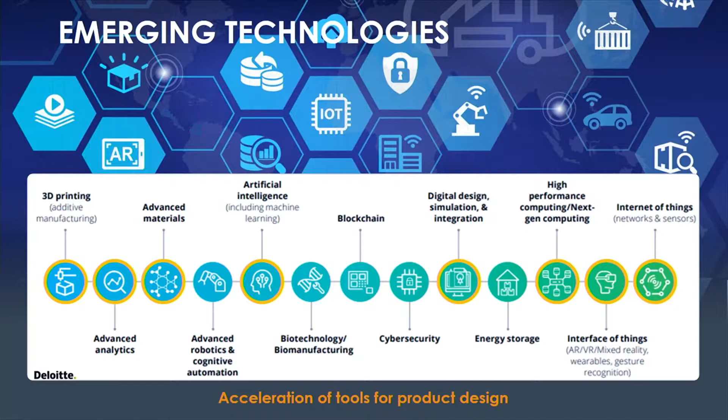Otherwise, we feel like it's going to be useless to you, right? And so that's, in fact, exactly what we are doing. What I'm going to do is use this wayfinder to walk you through what we've been up to. We're investing in 5 major areas across CREO to address those 8 orange circles you see there on the slide. And we're doing it on a single CAD platform that scales all the way from exhaust systems for Polaris.

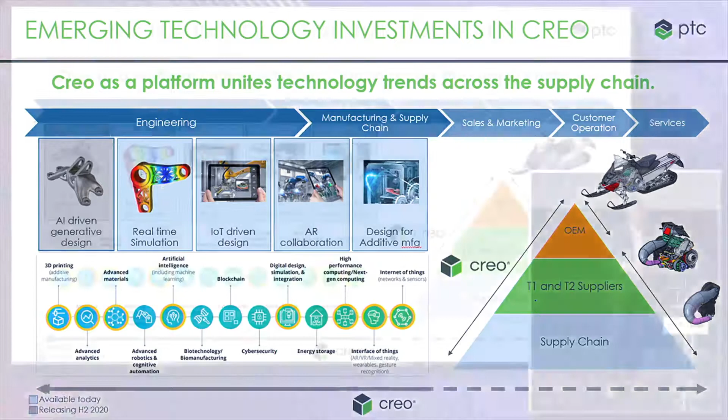I actually met that vendor at an event in the San Francisco area a few months ago. All they do is exhaust systems for Polaris. Of course, Polaris is a big PTC customer. All their major stuff is designed in our software.

But it goes much, much further than that. I mean, Polaris snowmobiles are, I don't know, a few thousand parts. There are assemblies out there that are hundreds of thousands, millions of parts in CREO, managed in Windchill. It's a single CAD platform that can scale from exhaust systems for Polaris snowmobiles to a 3.5 million part assembly built by the federal government, National Ignition Facility in the United States.

So we can scale with a single platform to whatever your needs are, and every bit of technology I'm going to talk about today will be right there at your fingertips in CREO.

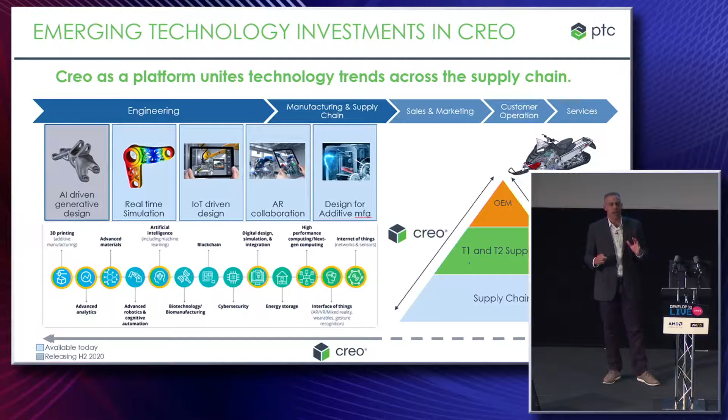All right, so I'd like to start with the only bit of technology that I'm going to talk about today that is on the near-term horizon, not quite in there in CREO, and that's generative technology. It's a little hard to talk about design without talking about generative technology nowadays. You got to make sure you address the big innovations happening in the world of generative design. This is one of those technologies that can really help democratize engineering and manufacturing knowledge. It is manufacturing-aware technology.

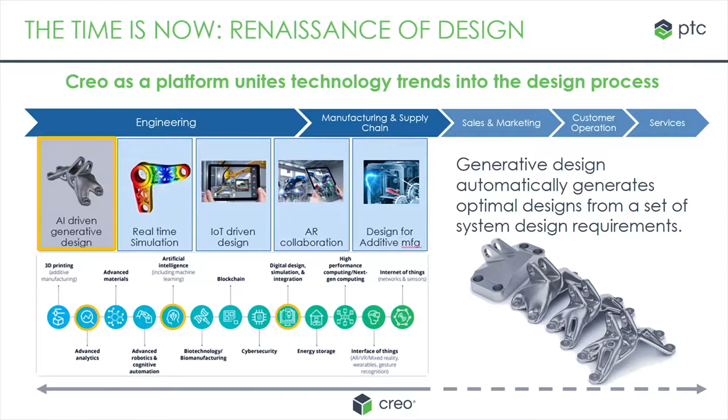I heard that phrase earlier today. It's very true, and PTC has been hard at work here, but we found a great opportunity to acquire a company called FRUSTUM about 5 months ago, who we believe was the leading technology player out there. We're very thankful to have Jesse Blankenship and his team working for PTC now, and we are hard at work making that technology part of the CREO platform.

We're not going to deliver you a point solution in generative technology. We're putting it inside CREO. So those of you that know Jesse, he's here today, and frankly, he's the expert about what I'm about to present, and I wouldn't have these slides if it weren't for him. So thanks, Jesse, for that.

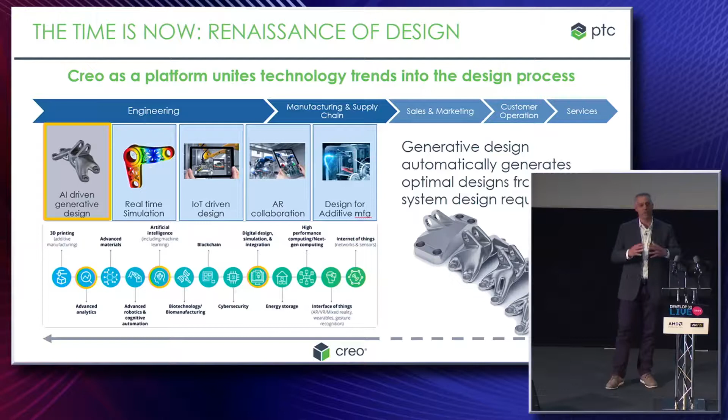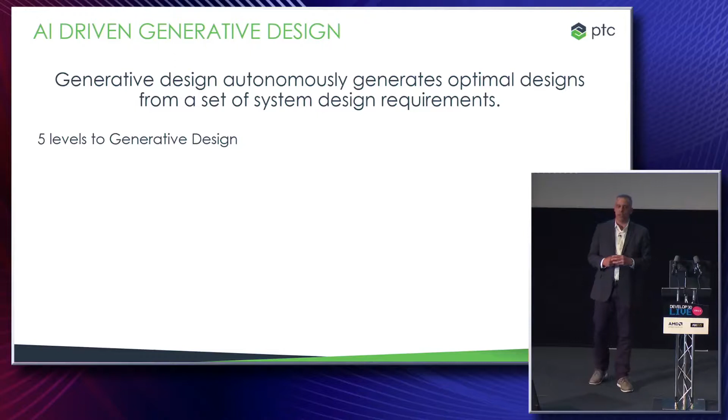What I want to do is walk you through a maturity model. There's been a lot of talk about what generative design is and what it isn't, and I feel like we're frankly one of the world's foremost leaders in generative technology now working for PTC. We have the opportunity to define what we feel like the generative design continuum really is. So let me walk you through it. I'm going to use a model that you're probably all familiar with. If you're in the engineering domain, you're familiar with the autonomous cars industry, and they use a maturity model that goes like 0 to 5, and I'm going to use a similar type of model to define the generative landscape.

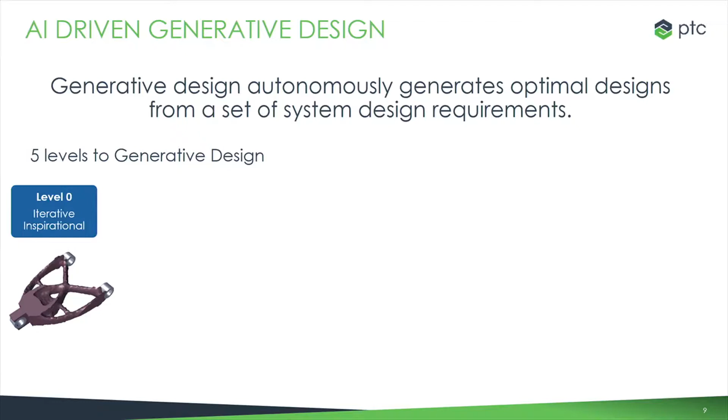So at the very left-hand side, not truly even generative design, we have what we call inspirational, iterative inspirational technology. It's really just topology optimization without manufacturable geometry. There are technologies out there that do that. That's where topology optimization started. I wouldn't even really call it generative design because it only inspires, if you will. That's where the word is, inspirational, iterative. It only inspires what the actual geometry should be, but the design engineer has to take it from there. I wouldn't even really call that generative design. It's just a base technology piece that is important for generative, but it's certainly not the whole story.

The next level up from that is the first time you see manufacturable geometry. So there's a lot of tools out there that'll get you this far.

You certainly can get that far in CREO, where you have your topology optimization results, and now you've got manufacturable geometry that you can carry on through the process. But that's still really just topology optimization with a nice twist, in that you're getting manufacturable capable surfaces out of it. Really, when you start seeing true first-level generative technology, it's really at level 2.

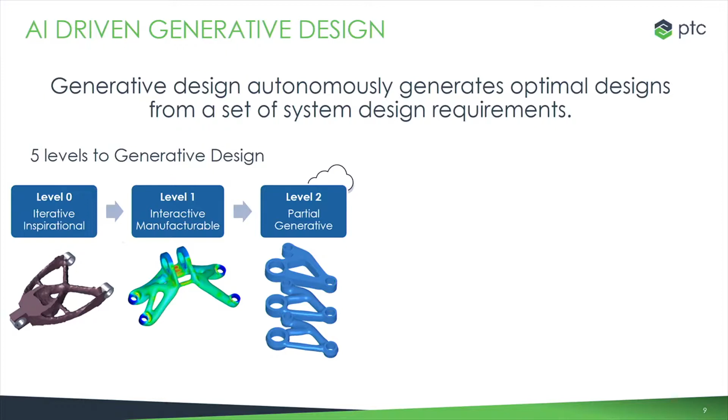Now, when you're doing this kind of computation, it's mostly probably going to be done on the cloud. It's not a requirement, but it's probably better, more scalable to do that in the cloud. That's why I added a little cloud icon. I am taking some liberties here with my icons. You just have to work with me here, okay.

At level 3, things start to get really interesting, because you're adding multiphysics into the game, and you're now starting to add some of these genetic evolutionary algorithms that could take 3, 8, 10 solutions and blow them out to hundreds of potential solutions to the same problem.

Genetic evolutionary algorithms are something I'm most certainly not an expert in, but we did indeed acquire technology like that when we acquired the Frustum technology, and it's going to be mind-blowing when it gets applied to CREO designs. We're really excited about where this will take us, and frankly, we expect to be here at this level in less than a year when we get the Frustum technology integrated into CREO.

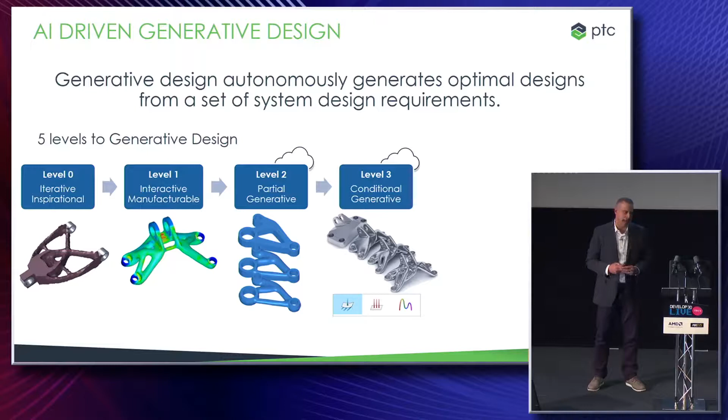So if you're thinking about where you're at today with your design process, imagine being able to apply this in CREO in less than a year from now. So we're headed there really fast. But let me build out the model and start to talk about some really crazy, wild things.

At level 4, we're almost fully autonomous, like a Star Trek world here, but level 4 is actually not too crazy. You're adding things like machine learning. Imagine a generative system that can take a look at your database of hundreds of castings that your company has done for years and years, and also take a look at enterprise information like cost, design for manufacturability information, maybe process quality information, and learn what does a good casting look like at your company. And then apply that the next time it's asked to do a generative study, and include casting as one of the manufacturing constraints. That's what level 4 generative technology will look like.

So I have a ThingWorx logo here because it's PTC's award-winning industrial IoT platform that can bring enterprise information in from any source for use in, say, a generative study. I also show a little assembly icon here because we expect at level 4 that generative technology can work at the assembly level and propose solutions with multiple part configurations versus just at the part level.

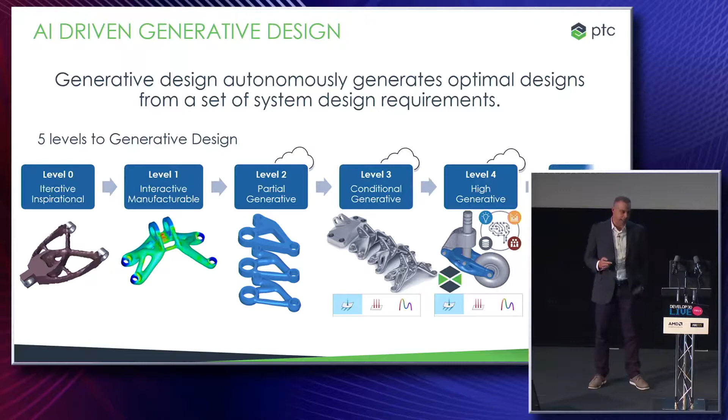Level 5 is, if you're a geek like me, level 5 might be like the Star Trek replicator world. It's just give me a coffee cup that does this, or I don't know, just give me a laptop, and boom, you got a laptop a few days later. That's crazy talk.

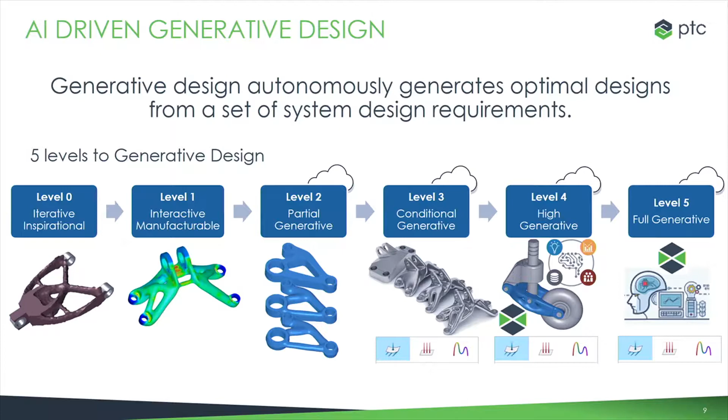But you have to have a right-hand scale and a left-hand scale on your scale. You have to have a right-hand maturity level and a left-hand maturity level. So you have to have a goal. Think of level 5 as like the fully autonomous - like I got in a car last night at Heathrow and drove here, but there was someone driving the car, instead of just getting in and saying, please bring me to Sheffield University. That's a fully autonomous car on the right-hand side. You could think of ultimately us all having a goal of fully autonomous generative, in the fairly distant future.

So back to level 3, what might it look like in the world of CREO? These are all sort of video shots pulled together of technology from our Frustum acquisition, but I want you to think through what this will look like inside CREO. This should play automatically. Yes, excellent.

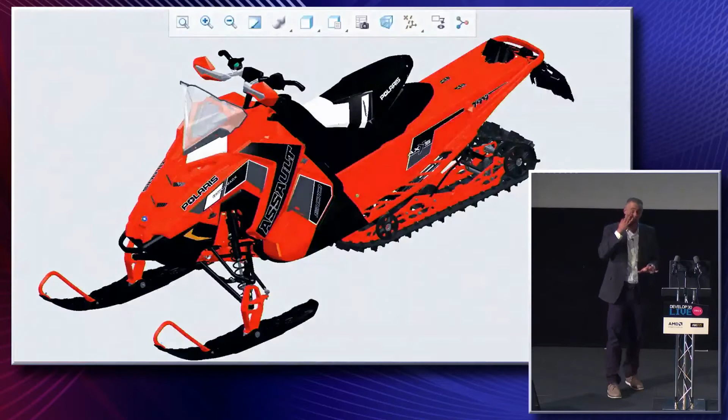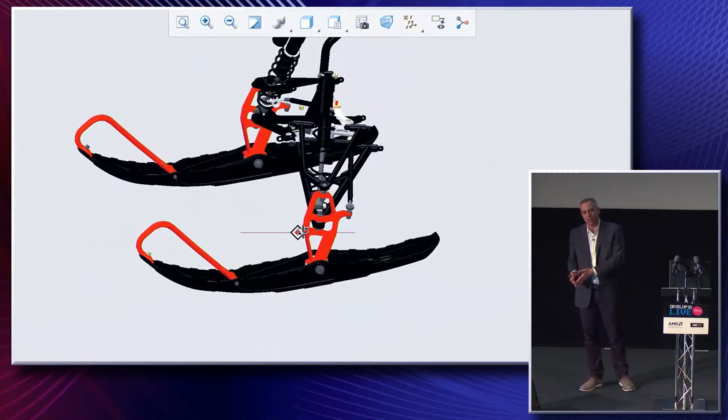So just like any other generative solution you might think, when you start out thinking about a generative solution, you have to define loads and boundary conditions and so forth that are the inputs to the generative engine. It just so happens, because this is a Polaris assembly that's got dynamics built into it, all that is done for you - all the loads and boundary conditions are all just coming from the assembly, so it's not a problem. Well, now then you have to define the domain - what is the domain that the generative solution is going to apply in?

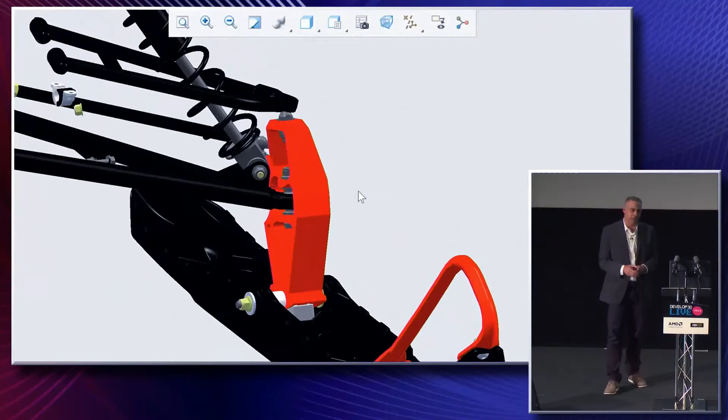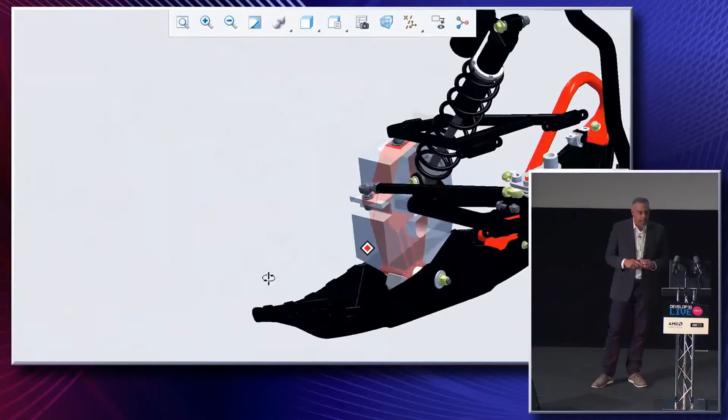Easy to define. It's just a simple volume around the part we're working on, this red strut. You've got to have clearance for getting at the assembly points, and you've got to have a notion of what the motion envelope is of the structure around there of the suspension. And so once you intersect those, now you have the domain that the generative system has to work on.

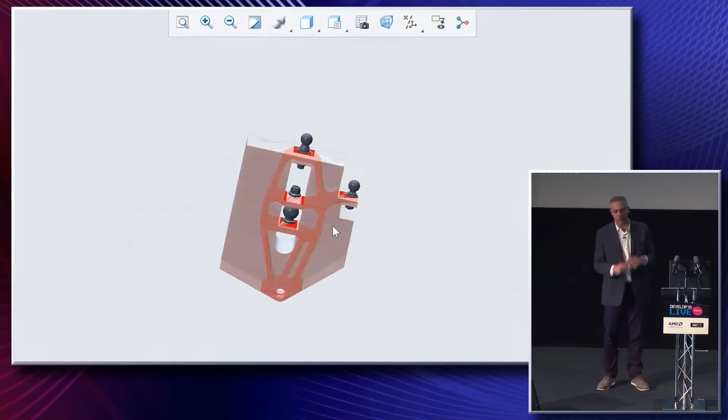Again, think about this all inside CREO. You're not in a point solution, right? So once you have that all defined, you got everything intersected, now you can go off and have the generative system run. We did a cool little montage so you can see multiple manufacturing process constraints converging at the same time.

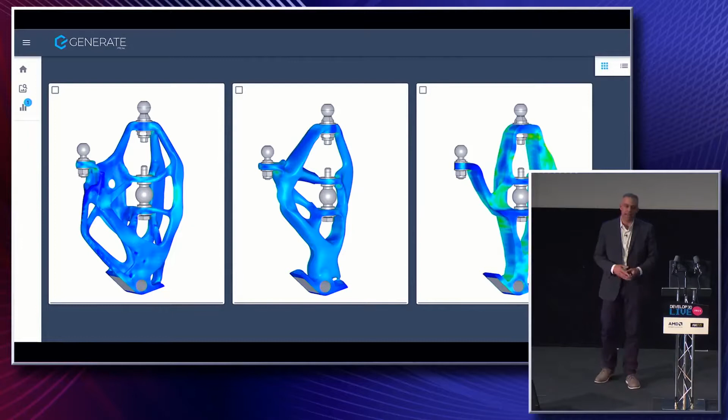Imagine this all running on the cloud. It could run locally, but it'll run faster on high-performance compute on the cloud. On the far left, you see sort of an unconstrained case. In the middle, you actually see a casting solution. I've seen some crazy parting lines automatically generated by the generative engine today that are really hard to model yourself, but the system is smart enough to know where to put them automatically. And on the far right, you're seeing a 3-axis machined example.

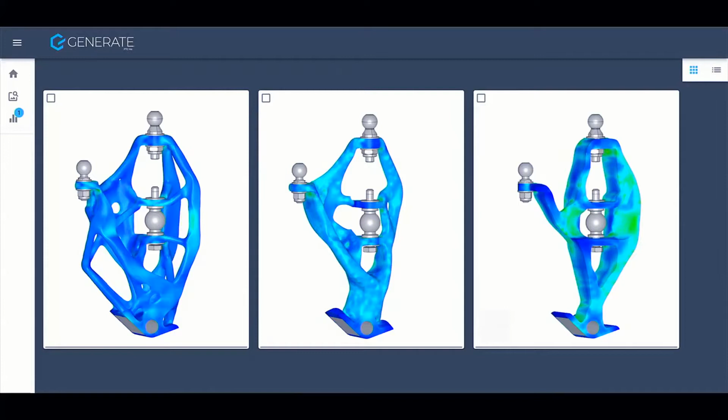All the stress solutions are all there for you so you can inspect what the results look like. But even more interestingly, as you go through this process of evaluating different designs, I'm only showing you 3 because I wanted you to see some of the detail here. I could have shown a lot more, multiple materials, that kind of thing, all possible with the Generate solution that we acquired from Frustum. But I wanted you to see some of the details and kind of see how clean everything looks. That's straight out of the system as it exists today.

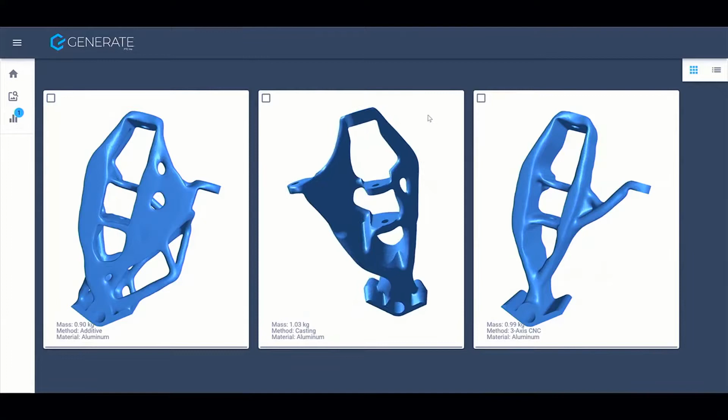Very, very clean, very nice, already coming out of the system. And you can evaluate those on the cloud, take a look at what the results were of the convergence, and then once you pick one, you get it immediately integrated back into your core CREO application on your desktop machine. And so the point of having this seamless integration into the CAD environment is a really, really important one.

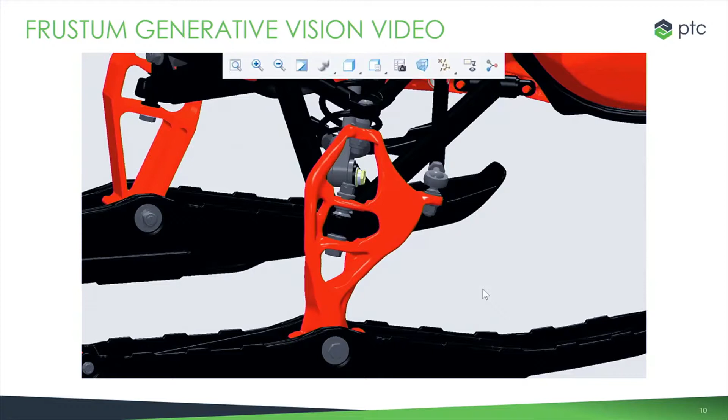And because these technologies have the innate ability to understand manufacturing processes and even over time learn what good manufacturing processes or good manufacturing parts look like, they can get better and better at democratizing that manufacturing process knowledge that might be going out the door as more and more really senior engineers retire.

So that's our generative strategy. You're going to see that technology in production hopefully next year when I'm here to talk about it and show you a lot more detailed demos.

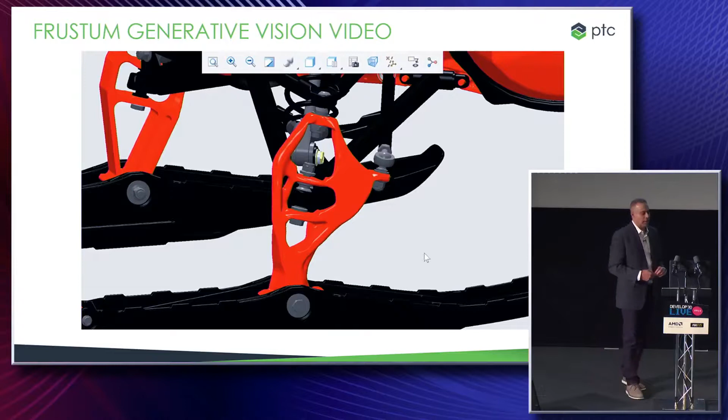I'd like to move on and talk about simulation. So there's been a lot of talk about simulation today. I think one of the challenges with simulation as part of an engineering design process is how disruptive it can be. It can be super helpful, but for the everyday design engineer, the knowledge of how to simplify a model in order to get an answer in a reasonable amount of time is not obvious to a lot of engineers.

And even if the simulation takes 15 or 20 minutes, it's disruptive to the workflow. If you've used CAD for 6, 7, 8, 10 hours a day, you know that you're moving, you're making changes, you're evolving your design. You need a simulation technology that can really keep up with you as you design.

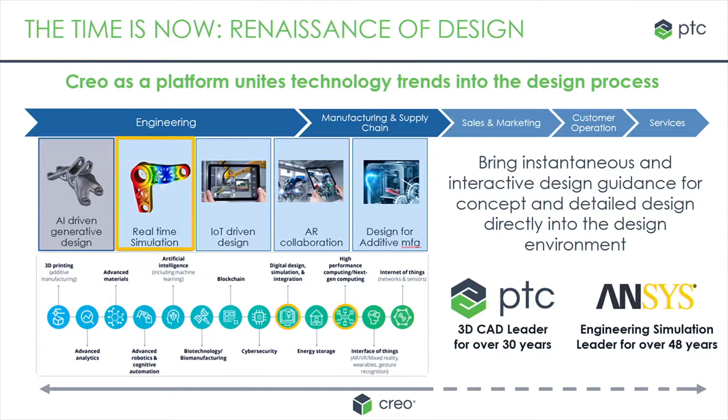And we found that simulation technology in the technology from Ansys. It's their Discovery Live simulation technology. It's so fast, it can really keep up with you as you do your design work and provide that design guidance that a design engineer really needs minute by minute as they make design decisions.

So we're really excited to already have this technology in production. By the way, everything else I'm going to talk about today, you can see live demoed in our booth. It's production technology. We've already been selling this now for a little bit of time.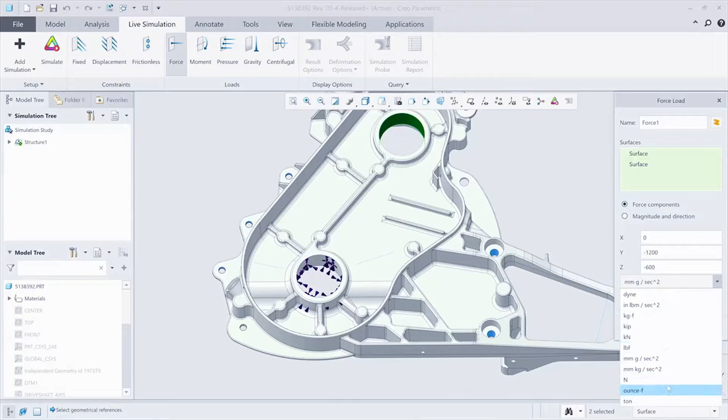The first part of this video, what you're going to see is how CREO Simulation Live can keep up with you as you make design decisions and how quickly and easily it can get you answers. You're never going to see any part simplification. You're never going to see simulation done in a separate environment. You're right here in CREO. And as a design engineer, you do inherently understand, okay, I'm holding it here and I'm pushing here and I'm pushing with a certain amount of force.

As soon as you hit go, within 2 seconds you got your answer. Not 5 minutes, not 10 minutes, no simplification, you just have an answer in CREO. So now you have an idea where are the hot spots, where are the not so hot spots with the current set of loading conditions that I have, and you can then go evolve your design.

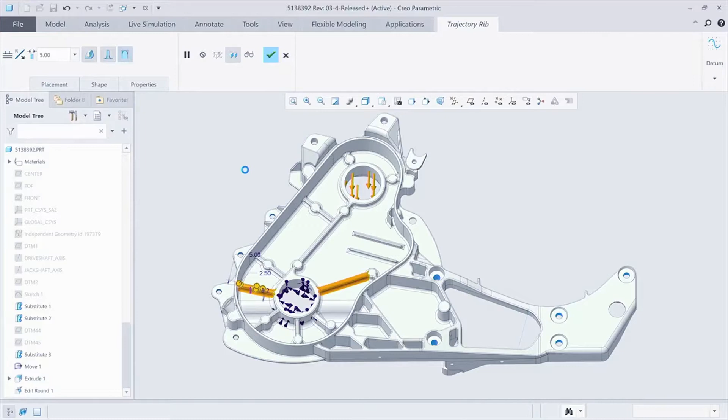You see the simulation result here paused, but only because I'm in the middle of creating a new feature to address some of the high stresses I have in the model. As soon as I am done, the stress results update, seconds later. It's like choosing whether or not you have the part in shaded mode or not. It's that fast, right?

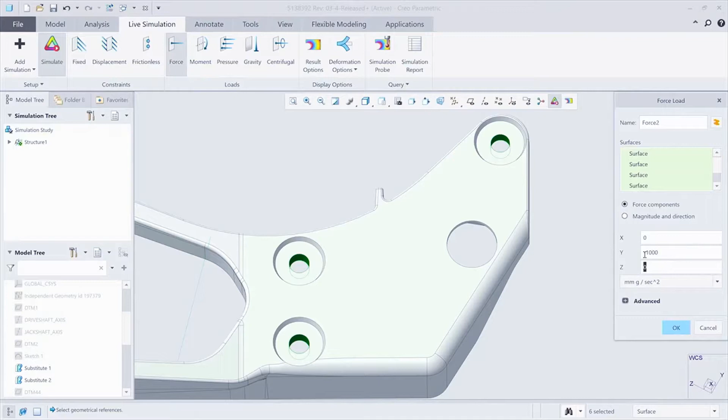So fine, the design requirements change. I'm early in the design process. I'm already getting simulation feedback as I design, but I got new requirements. I have new load information. So I'm applying that new load information, and you'll see as soon as that new load information is incorporated into the system, again, the design updates, and now I have a new hotspot.

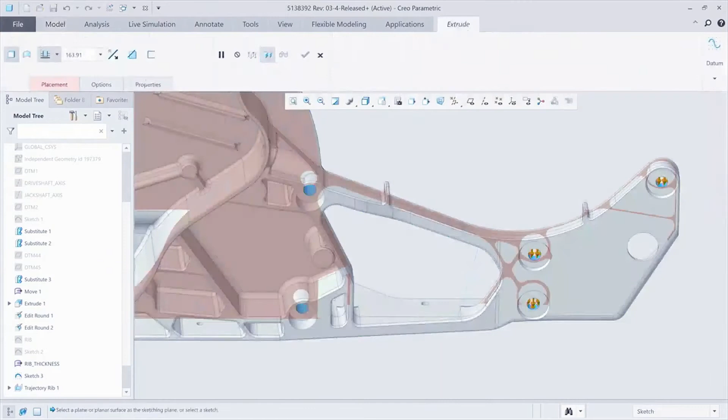I got a different problem. Actually, the stresses in the area that I was worrying about before, not quite as bad as they are in a new area. So fine, I'm evolving my design, and I'm getting feedback as I go. Every time I make a change, I know whether or not I've improved the situation or I've made the situation worse, and I haven't had to consult the simulation expert once. I'm just there doing my design work as an engineer, right?

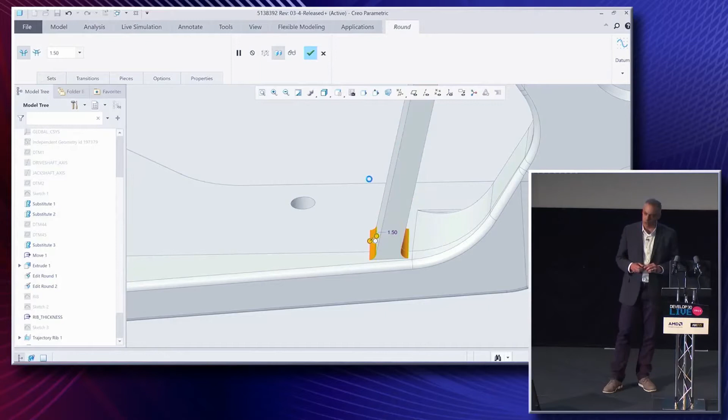So I make another rib. I see things that have significantly improved, but all good design engineers know that you don't do a molding feature on a molded part without adding some nice rounds, right? We don't want to have sharp edges in our tool. So, okay, we'll add some rounds. You see the situation gets a little bit better, but it's actually not, I know what's going to happen.

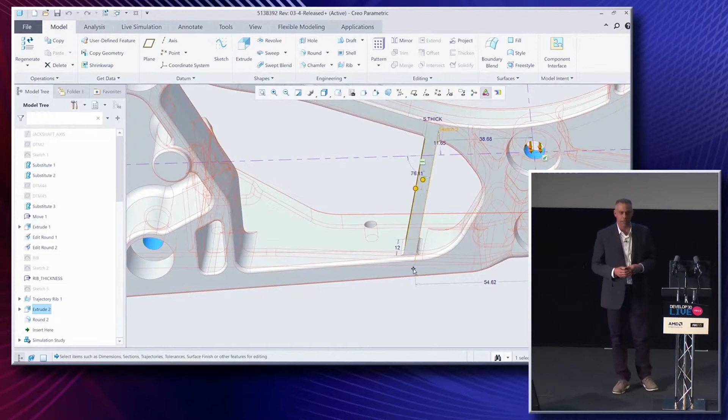I've shown this video before, right? Okay, I know what's going to happen. It's actually not going to improve until we move the rib over. We got to actually change the flow of stresses in the part a little bit. So once we move the rib over, then things significantly improve. Okay, so that's what you see here at the very end, moving the rib over, and now things really improve.

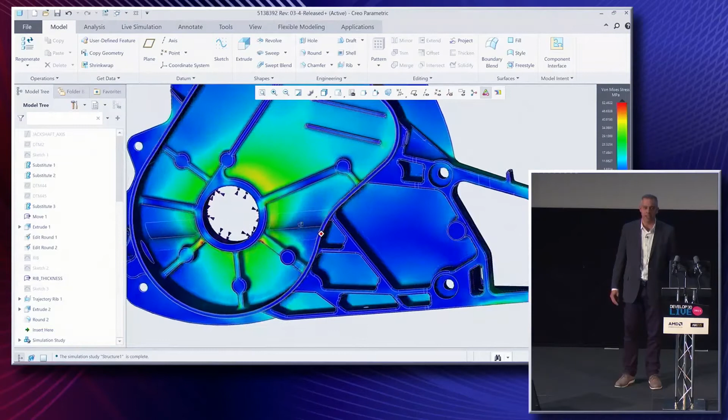The point is, not a single time did I have to get up out of my seat, walk down the hall, and ask a simulation expert to help me simplify the model so that I can get an answer 10 minutes later, or 2 hours later, or 4 hours later. I just did 4 or 5 simulations in a matter of minutes, right? Very, very powerful, very reactive, very good guidance.

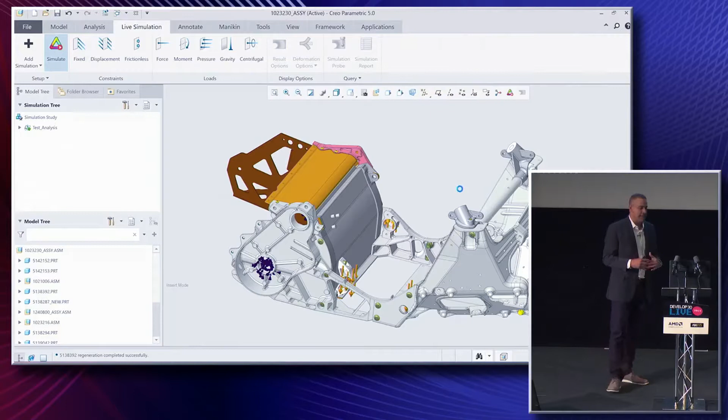But the power doesn't really come through unless you see it in a bigger scale. This is a fairly large assembly. You can see there are a lot of parts. There are lots of detailed geometry in here, right? There's a lot here. So now we're taking in assembly level loads, flowing those loads through all the parts, and seeing if CREO Simulation Live, based upon the Ansys technology, can help us get an answer very quickly.

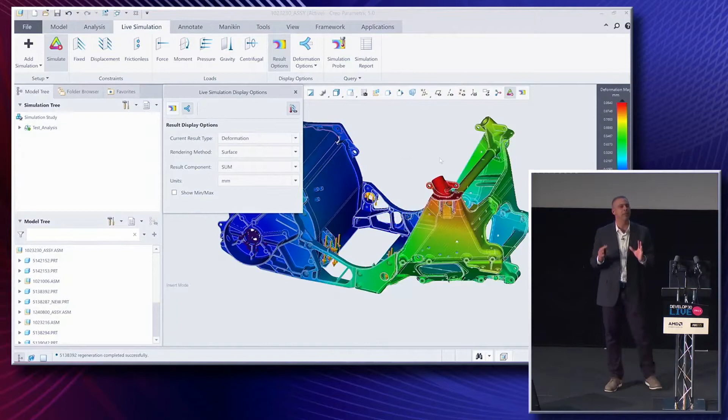Well, this one takes about 3.5, 4 seconds. Is that good enough? Does that work? It's pretty quick, right? So now we're seeing the same kind of results, but now in the assembly context, extremely fast and powerful. I mean, imagine how much time it would take you to set up a structural simulation on this assembly with all that geometry. It's going to take you a day, if not more, right? But I get a result very, very quickly.

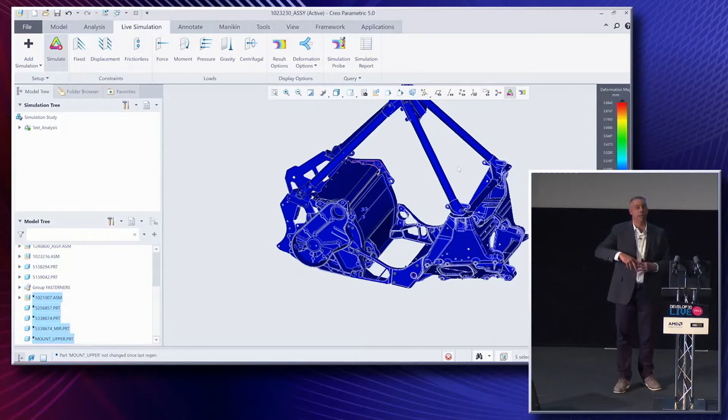What you're seeing here is we've changed the output from stress to deflection. The deflection in the front right-hand corner is actually about 1 millimeter. It's a little too much, right? Interestingly, I can just resume a bunch of formerly suppressed parts. Simulation just updates. I just added half a dozen parts to the assembly, and boom, I got an update. Now the deflection in that front right-hand corner is about 1/3 of what it was before.

Just imagine how much faster you can get products to market if every step along the way you know if your design is getting better or worse relative to your design requirements. Just imagine how much faster the simulation experts that do work at your company will be in doing the final simulation validation when every step along the way you as a design engineer have gotten guidance from this amazing ANSYS technology right inside CREO. You will be faster and you'll produce higher quality products, I'm sure of it.

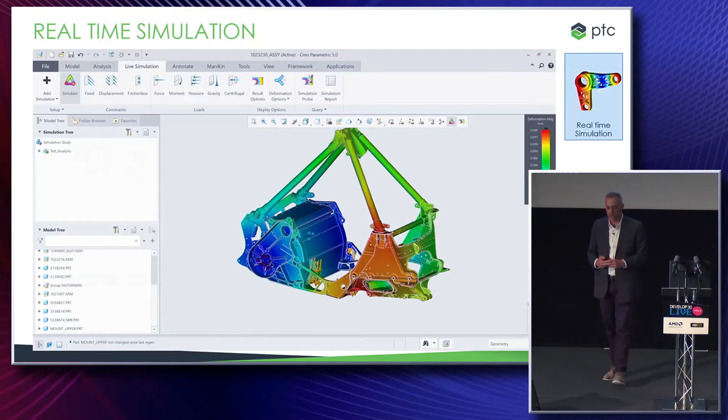Okay? So moving right along, I'd like to talk about IoT-driven design. You know, I think 7 years ago now, PTC acquired the ThingWorx platform.

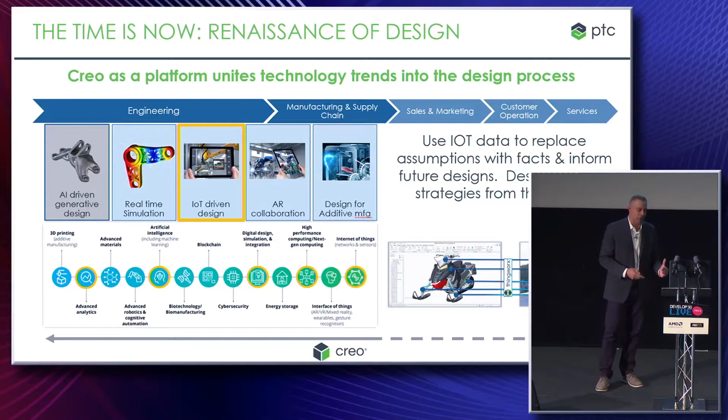I'll be honest, most companies move down a path of IoT-driven design mostly because they want to do a better job servicing and running their operations. They want to integrate data across multiple disciplines. I think integrating data into the design process could be really useful, and the more companies we talk to, the more we see that.

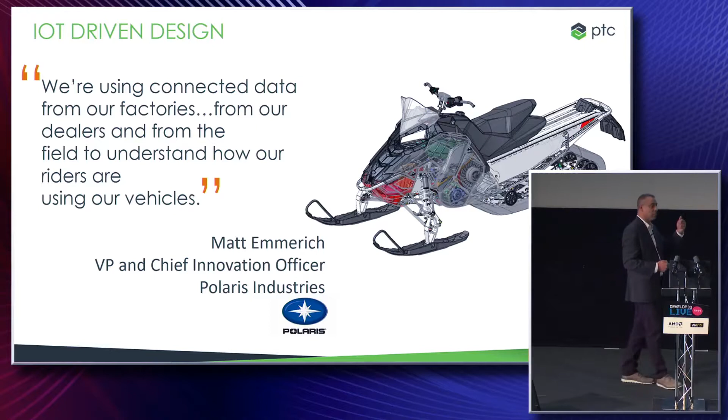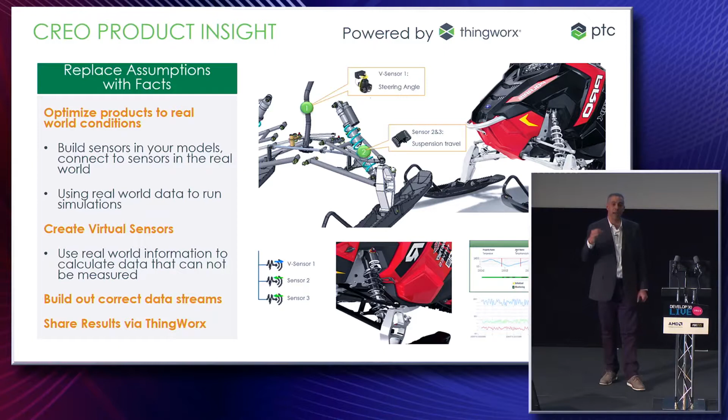Polaris is another great example of a company taking data from how their sleds are used and using it to inform next generation design decisions. PTC, since CREO 4, and now CREO 6, has had a technology called CREO Product Insight that lets you integrate sensors into the design that are ThingWorx aware, IoT ready. They have receptors for data that can come through the cloud, through our ThingWorx platform, and bring data directly into the design environment so you can gain greater insights into what's happening to your product in the field, perform simulations, and so forth.

So here's a great little video: CREO Product Insight.

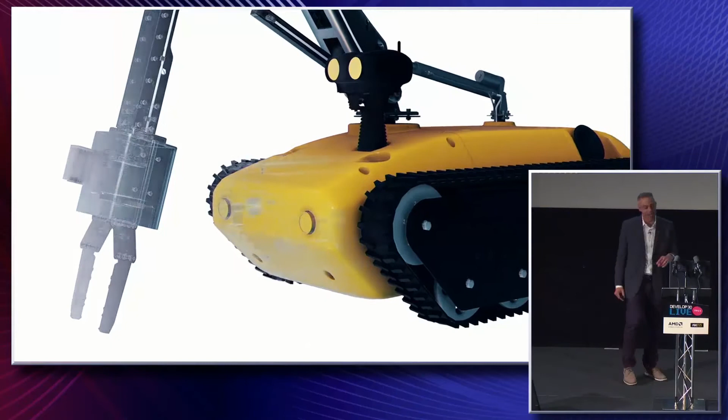What you're seeing here is a cool demonstration of a little robot with some sensors in it. You don't have to have models of your sensors. All you need is a part with a point in it and say, this is where the temperature is, this is where the force is, whatever. We happen to be showing actual sensor part assemblies that don't need to be physical 3D models. All you need is the semantic understanding of a sensor in your CREO assembly and you'll be fine.

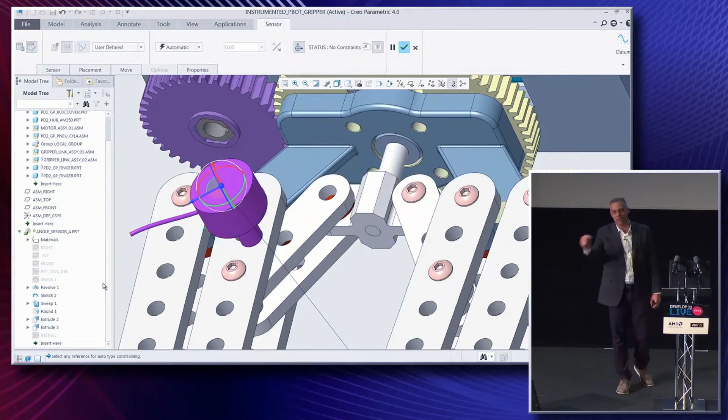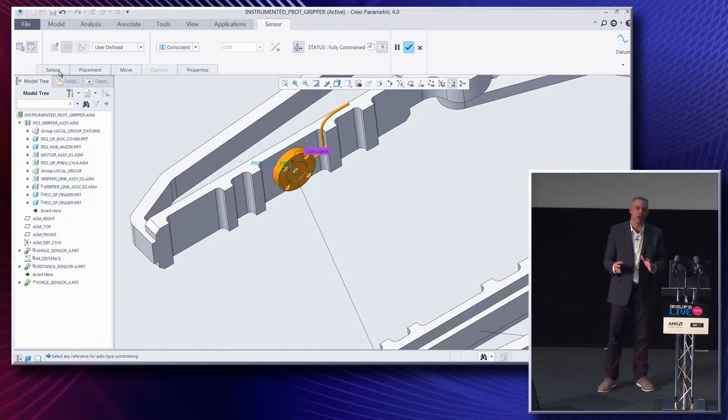So here we have an angle sensor to track how much the claw is open or closed, and we're also integrating a force sensor to track how much force we're clamping down on our parts with. These sensors can then be bound to data streams in ThingWorx directly from within CREO. We won't integrate technology unless it's right there in the CAD environment—you can do this right from within the browser in CREO.

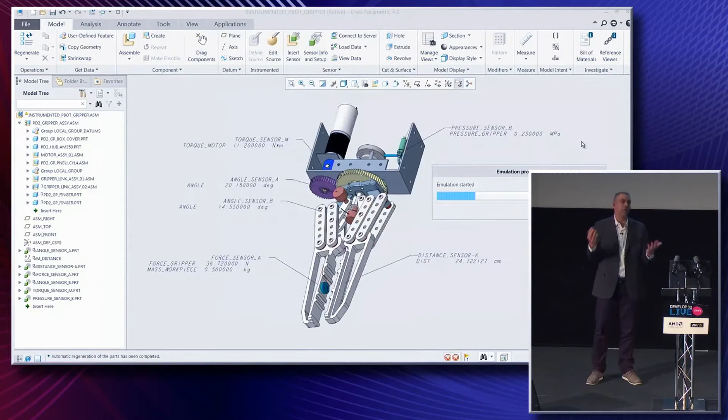So this is what we're doing here: binding to a data stream in CREO, and now binding to a data stream in ThingWorx. Now CREO and ThingWorx can work together to look at any circumstances you want ThingWorx to look for and automatically run simulations, like the ones you're seeing here, based on whatever conditions you think might be interesting or relevant.

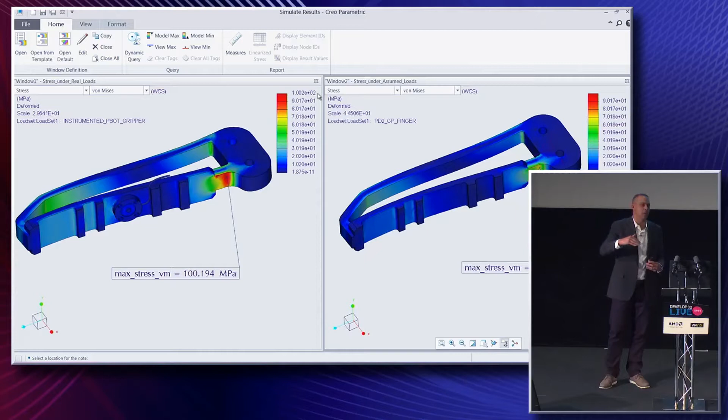In this case, the design engineer is walking through the process manually—gathering the time series data from ThingWorx, running it into CREO, running the simulations all manually. But you can tell ThingWorx and CREO to work together to do all of this automatically: just pick a certain set of conditions you're looking for, ThingWorx will look for those, and CREO will automatically run the analysis on that data, all without your doing.

Let me move on quickly to talk about AR. AR technology is another technology being widely used in the industrial workplace, mostly to make manufacturing and service workers more efficient. We believe it's really relevant and valuable for design engineering for collaboration purposes.

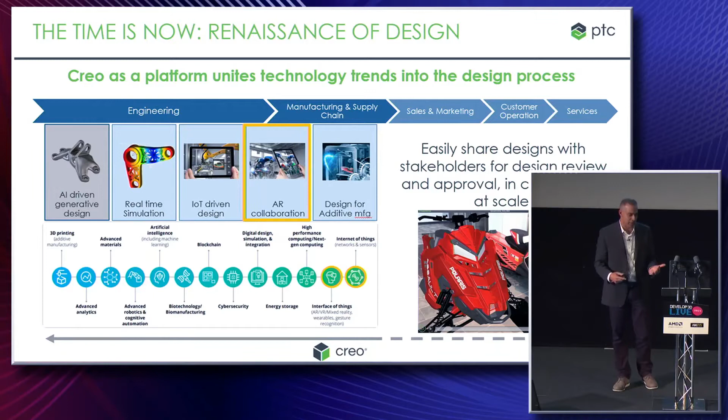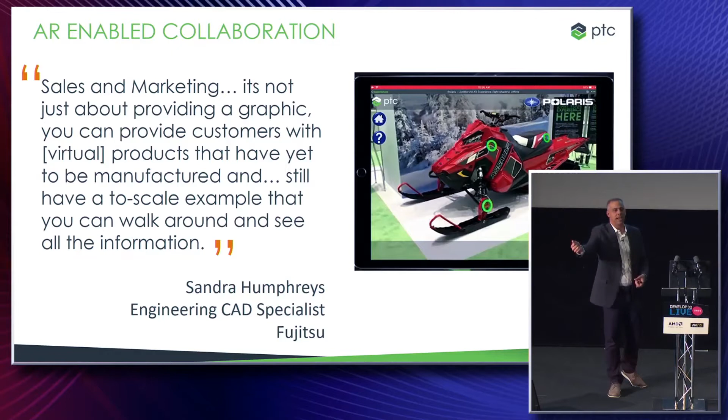Because we host the AR server, we see thousands upon thousands of customers using our integrated AR technology to allow engineers to collaborate—either with their customers to see if a proposed design concept works well, or with each other instantly anywhere in the world. And we've made a lot of improvements.

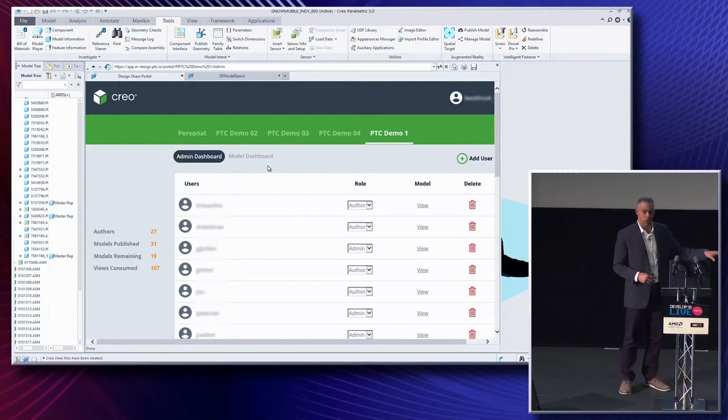I think two years ago, I did a demo in this room with a big ThingMark on the floor in the auditorium—you don't need those anymore. The AR technology from PTC has advanced incredibly. You just tell the system where the floor is, and we automatically scale the experience. Every engineer can manage who sees what experience, and no data leaves your laptop—we're only streaming triangles. All you need is a link from me, download a free app from the App Store, or it also works on HoloLens.

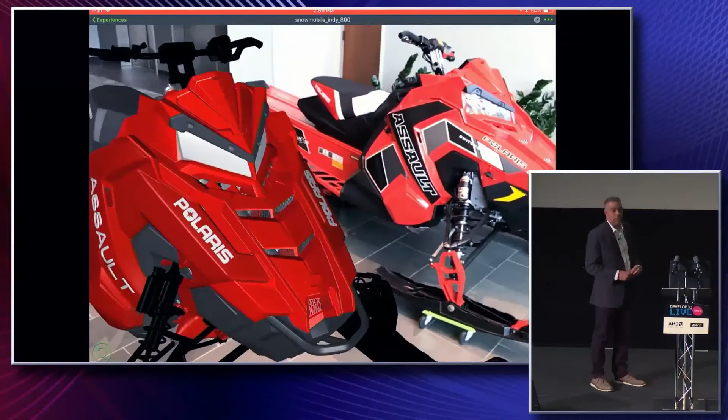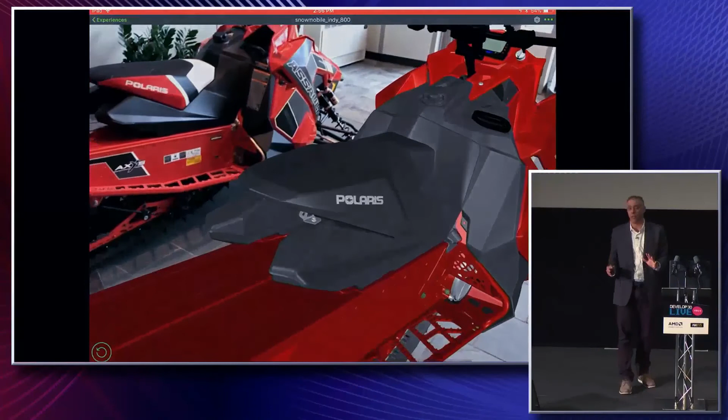And you can see here, that's a pretty darn good scale, automatic. That's the real Polaris snowmobile on one side and the AR rendered one on the other. It's one-to-one, fully immersive. There's nothing like seeing your product at one-to-one scale right there in front of you as the design progresses. It's very, very powerful.

You don't realize how much you miss just seeing it in 2D unless you experience it in 3D. You can try this out later today.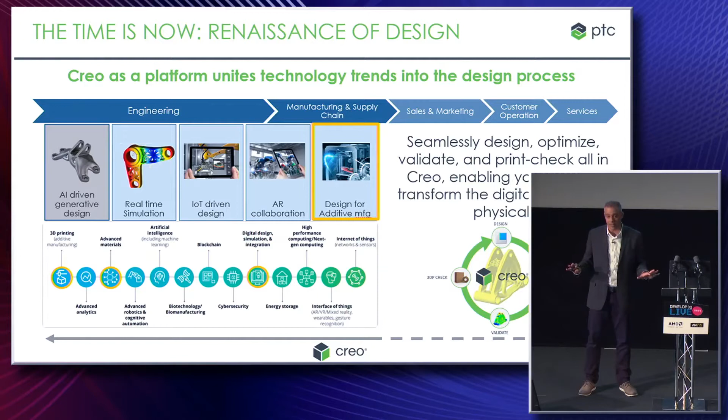Okay, the last topic I want to talk about is additive manufacturing. This is something I've actually talked a lot about here. This is a place where there have been tons of point solutions. And because additive manufacturing has become more and more interesting, we saw an aerospace example earlier today, a really good example. It's really relevant to a lot of companies that care about fuel savings. It's even relevant for a lot of companies that are just trying to innovate, right? A lot of it's happening in production, and if it's happening in production, it puts pressure on the design system.

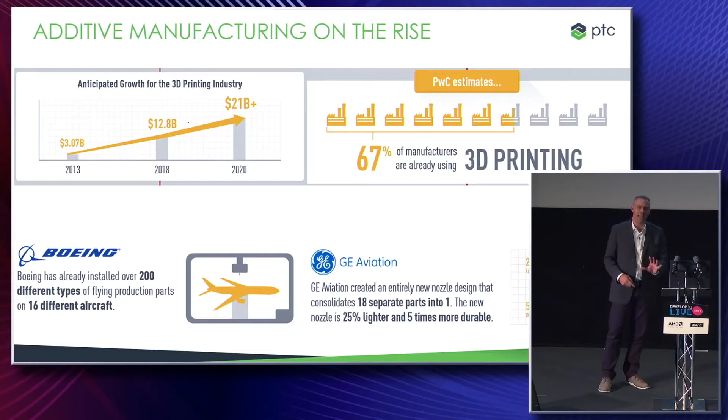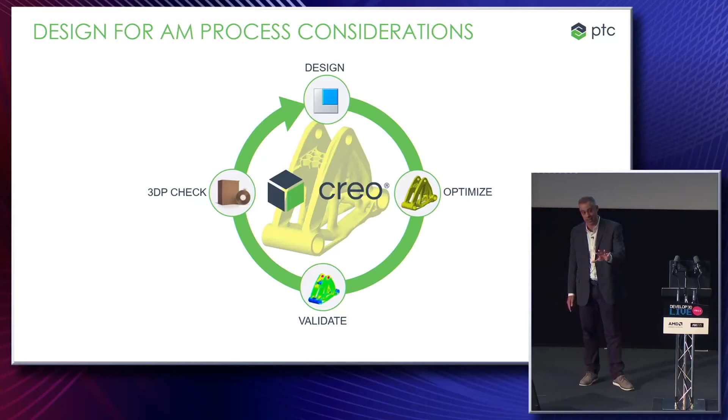The design system has to support it like any other manufacturing process, right? And so when we studied this many years ago, and we were thinking about CREO 3, we saw a disconnected process, multiple tools being used for multiple steps, and we said we just can't have that. We've got to have it all inside CREO, and we've done a lot of work here. I don't have a video on this because we just released CREO 6, and we took some of these things to the next level. It's really amazing, particularly in the lattice areas.

You see up here, we can now do these really, really dense foams. They're called stochastic lattices. If you're really a geek like me, you like that word. Stochastic lattices to do some amazing things with structures and foams directly inside CREO. I got news for you - you can't print that with an STL. So we had to change things on the printer interface side too. That would be a massive file, but you can do that directly inside CREO, not just model it, but you can simulate it and so forth, right?

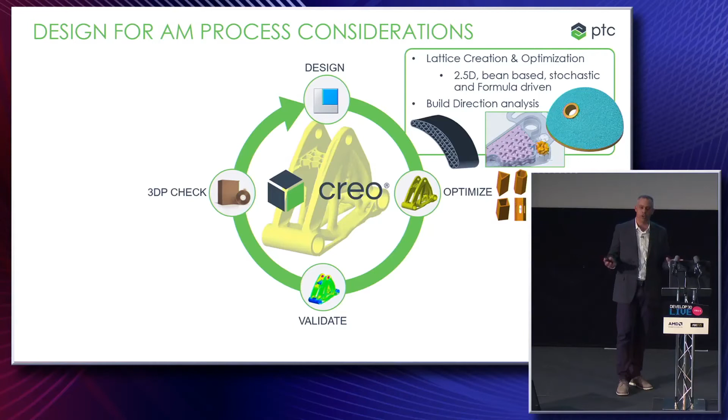We also built these cool things in CREO 6, these so-called gyroid lattices. They're really important because they're self-supporting. You don't have to worry, if you're making them out of metal, about support structures. The geometry itself is inherently self-supporting. So we did all that in CREO 6, all this other stuff we've had for quite some time.

We have had topology optimization for two releases now in CREO, and now it works at the assembly level. It has always resulted in manufacturable geometry from the very beginning. I promised you I would not put technology in CREO that broke your workflow. This does not. But you might ask, what about that FRUSTUM stuff?

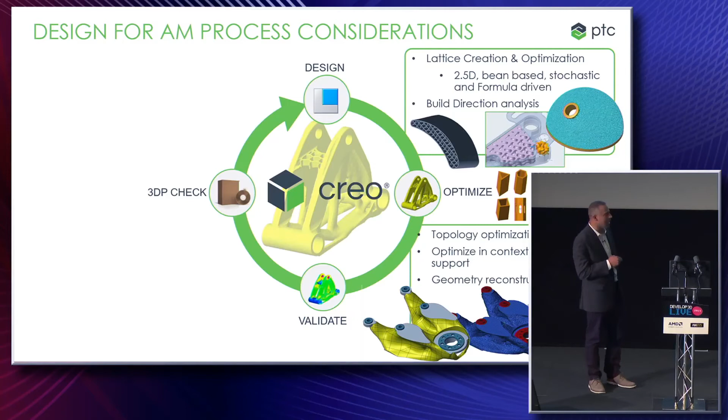Doesn't that supersede it? Yes, the FRUSTUM stuff will supersede what we have here. That is coming, and it's better than what we have in the technology today, so it's only going to get better from PTC there. We've done a little bit of work on our tray assembly.

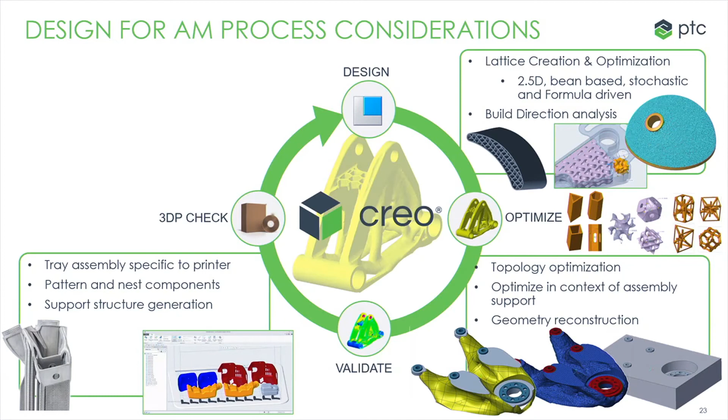The tray assembly is the additive manufacturing equivalent of the manufacturing process assembly for machining and so forth. You have to have that. We've done a little bit of work there, and we've done a lot of work actually in supporting 3MF, in particular for these super dense lattices. If you want to try to communicate a super dense lattice like that to a printer, you simply cannot do it with an STL. It just won't work. You have to communicate it layer by layer. You can do that in CREO, okay?

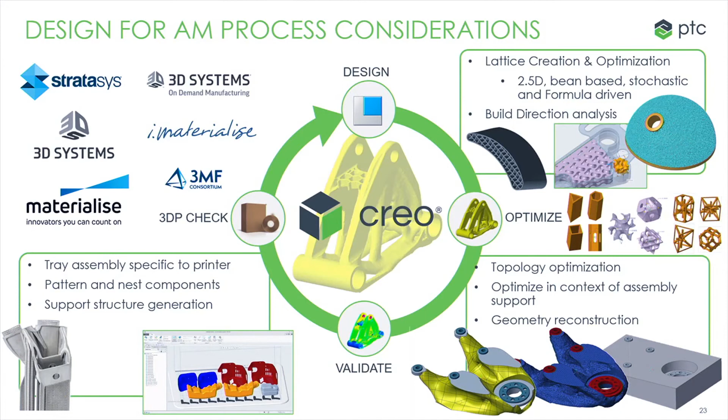Again, I won't put technology in your hands that's not deeply integrated into CREO so you can use it as part of your everyday workflow.

All right, I'm just about done. I think this was a very quick whirlwind tour through what we're working on in CREO. I do think we are at a moment here in the industry. There are so many amazing new emerging technologies that are going to help you be more effective. It really is a renaissance of industrial design.

I encourage you to get started by taking a look at CREO 6. Everything you saw today, except the generative stuff, is there. It's ready. It's in production. You can see it in CREO 6.